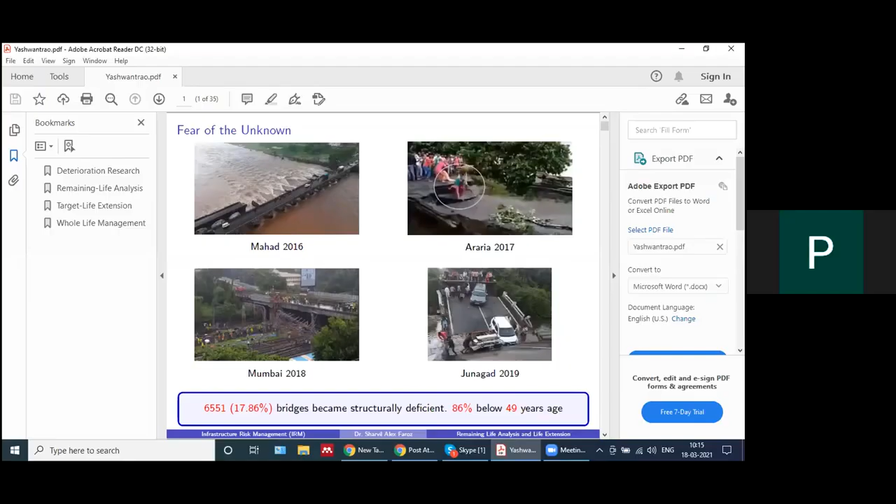Before getting to the main topic of my presentation, I will give you a kind of background. You can also give your comments in the chat box. How many of you, when you are going under a bridge, either walking or going through a vehicle, do not feel safe? I myself, sometimes when I'm walking under a bridge, I look up, thinking will it fall or not. That is how the situation has become these days.

So basically, it is the fear of the unknown. We don't know when a particular bridge is going to fall. Why has this mindset come? Because from the past 5 years, since 2016, there has been at least one bridge collapse in our country. Here are a few major events which occurred.

In 2016, this was the Savitri River bridge collapse in Mahad. Then in 2017, there was a bridge collapse in Bihar, Araria. Then in Mumbai in 2018, this is the Andheri bridge, and then the Junagad bridge in 2019. So if you see, every year there is one bridge collapse. So it is natural that we feel unsecured when we pass under a bridge or any other infrastructure.

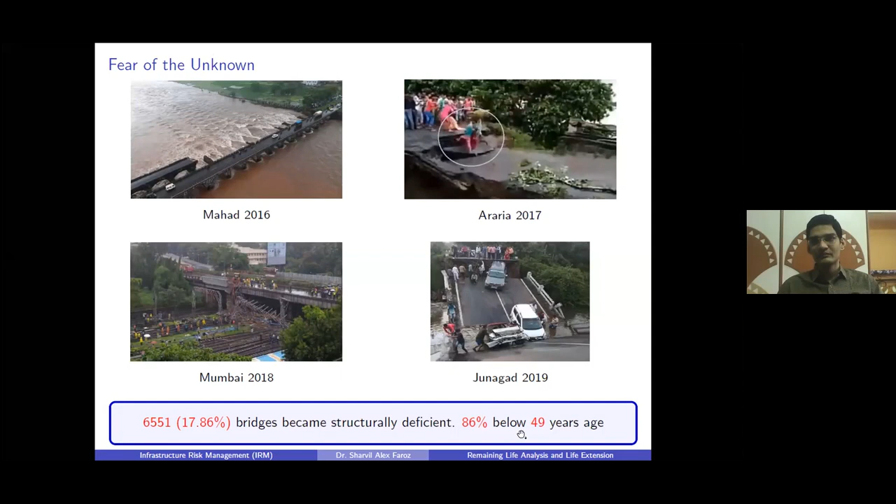Now, as I told you about deterioration, these are very important if you want to know the condition of a bridge. Since this is a platform for innovations in concrete, understanding deterioration is also one of the innovations. So let us understand a few basic deterioration cases which are very common. There are others also, and since we have a limited time frame of 1 hour for our presentation, I'm going to present only limited technology. In 1 hour it's not possible to cover everything for a given bridge, but you will get an idea of what kind of things are going on.

There is chloride-induced corrosion and there is carbonation-induced corrosion. If you go to a beach and observe the structures close to a seashore, you will find that a lot of corrosion is happening, because of the chlorides which are coming from the sea. They go and attack the concrete.

Then the second one is loss of strength of the concrete. If you build something at M20 grade of concrete now, over 50 years the strength will reduce somehow, because of other various attacks which are occurring.

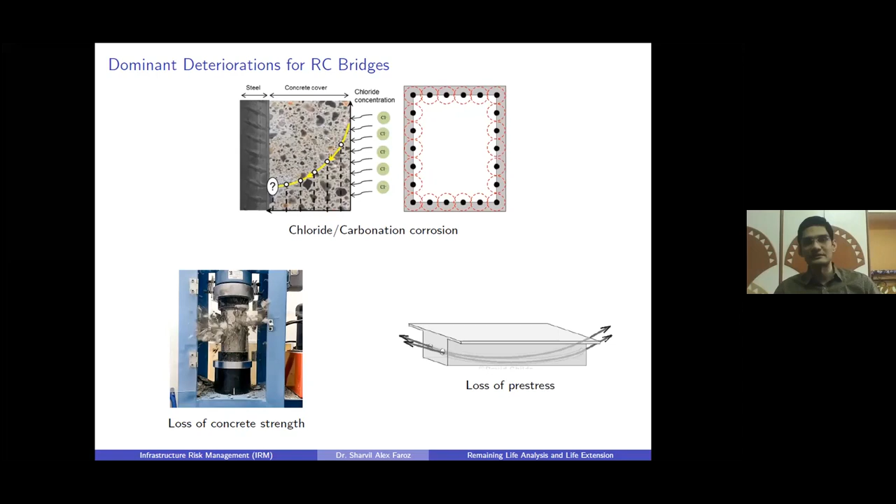Then this last one here is the loss of pre-stress of concrete. We are seeing a lot of pre-stressed bridges, but over time these strands lose their pre-stressing force, and this is a very big challenge in the industry today, because many bridges we have constructed are pre-stressed, but we are not able to find out what is the existing level of pre-stress. We have also developed technology for this, but again, this is limited to only remaining life analysis. So I'm not going to tell more about this.

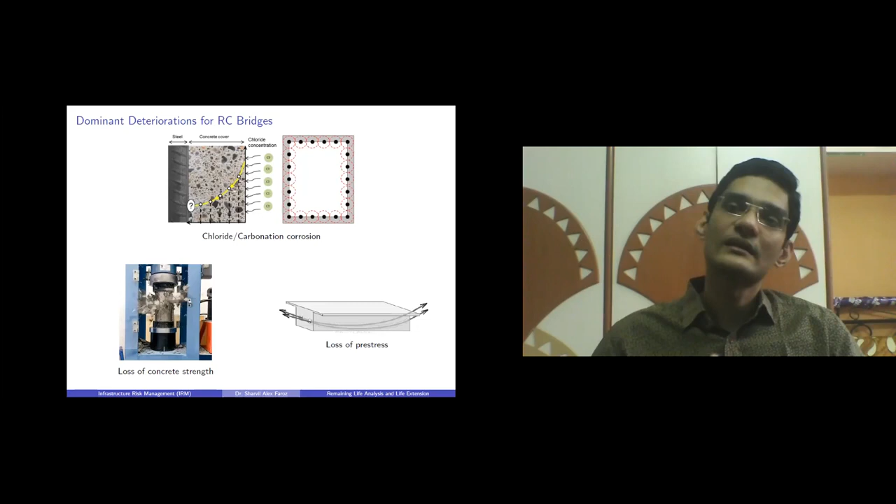Basically what it says is, when these old bridges or buildings or any dams were constructed, say 40 years back, we did not consider deterioration to be an important factor in its life cycle. What does it mean? That when we designed this structure, we did not take into consideration that in 10 years it is going to corrode, and then what will be the reduction in its capacity—that we did not account for.

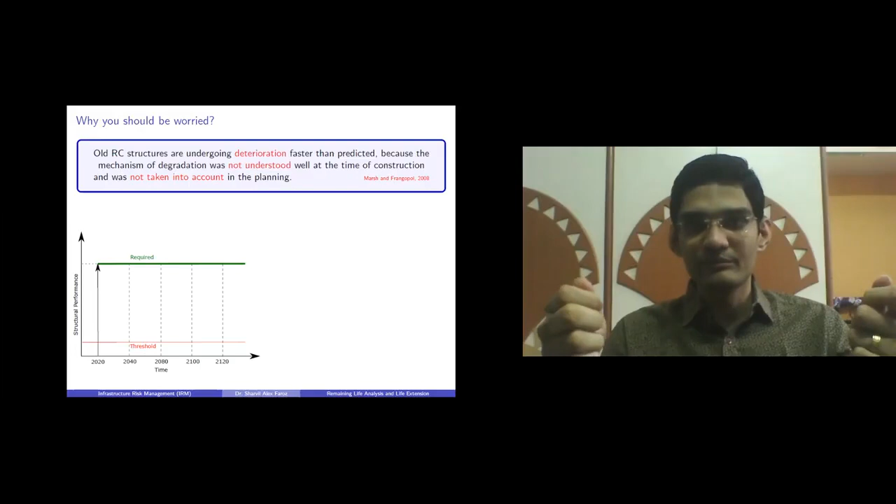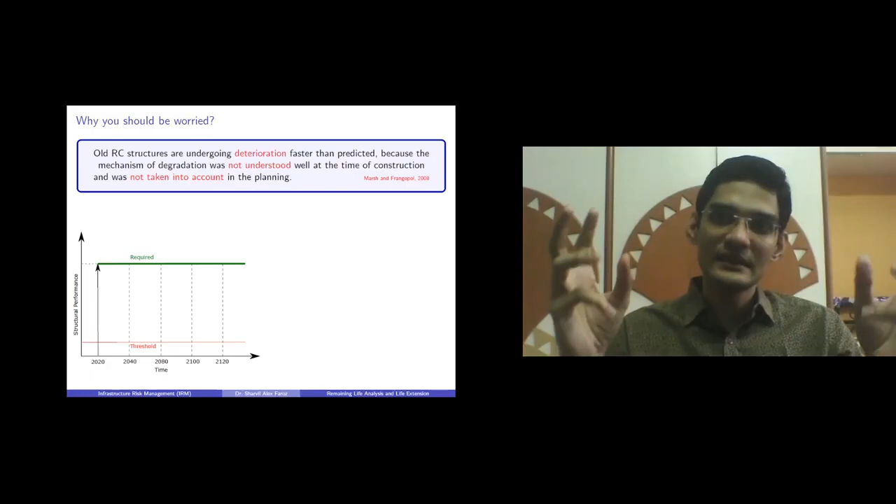You know that in simple language, if we do not consider a particular load on a bridge while designing, and when that load comes on the bridge, it fails. This is a simple logic. So we did not consider deterioration to be an external load. Therefore, whenever deterioration takes place, it causes failure of the system.

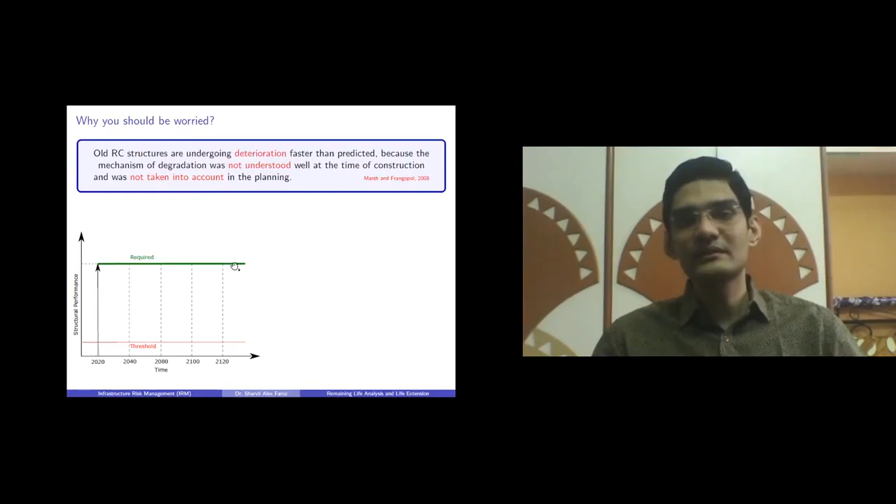So here in this figure, you can see what I am basically saying: when I constructed this structure, I considered that the performance is going to be the same throughout its life. That is how we used to design the structures—we did not consider that the performance is going to fall down.

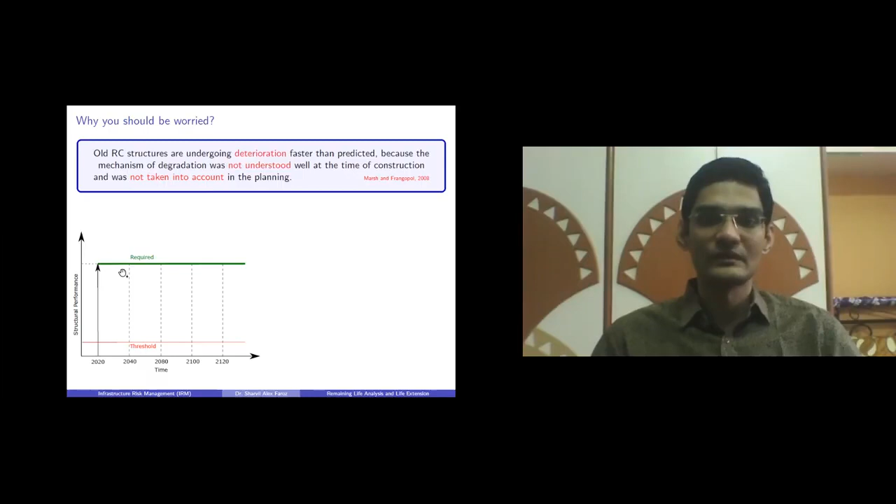Then the other issue is also that when we are doing investigation of these bridges, we do visual inspection. But what happened in New Zealand, these engineers were going and doing inspection of the bridges. And one of the bridges, called the Sorell Causeway Bridge, they also inspected. It was very close to the seashore, and it was a pre-stressed concrete bridge.

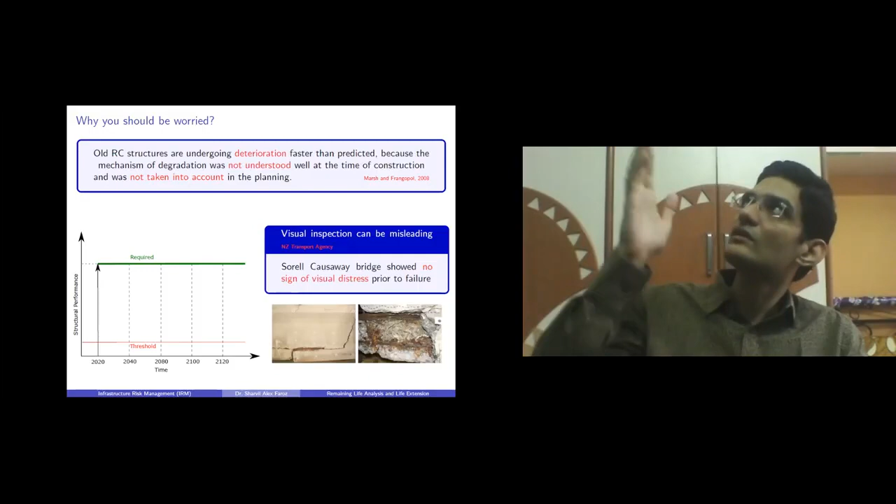The engineers came and they saw, okay, everything is very nice.

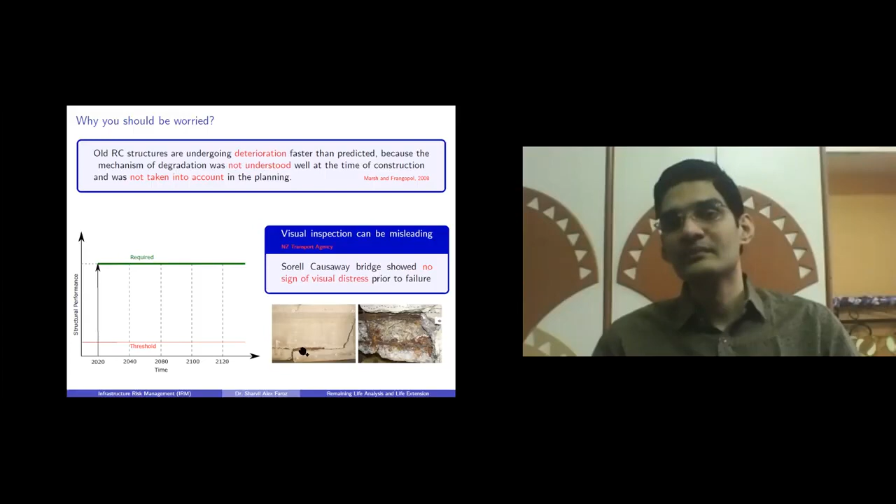So this is also one issue. We cannot rely on visual inspection always to check the condition of a bridge. This is also one of the reasons why bridges have been collapsing.

So what we learned here is two things. First, we did not consider the deterioration at the design stage. Second, visual inspections cannot be relied upon. So we need something better to do an assessment of the bridges.

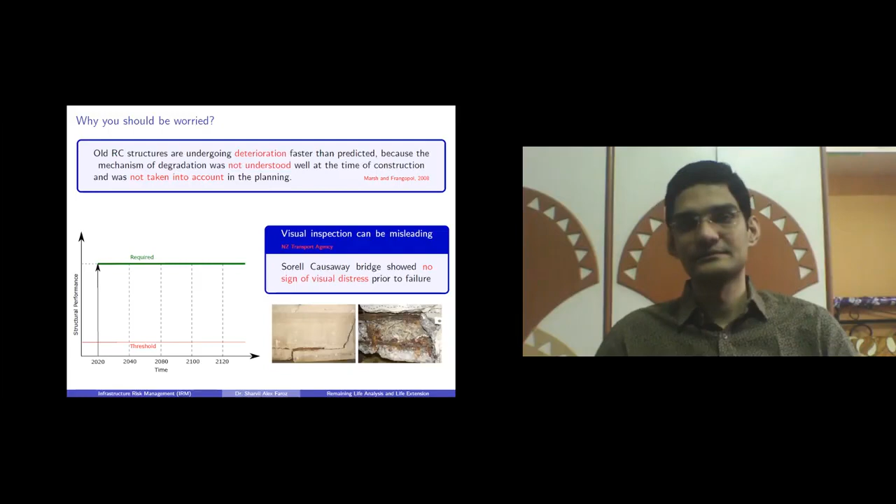Let me share with you 3 points, or 3 demands, of the bridge owners.

Recently I spoke with one of the PWD engineers, and they told me we have so many bridges. The issue is, first of all, we do not know what is the condition of the bridge. Since there are so many bridges, it is very difficult for us to tell if a particular bridge is going to collapse. Is it safe? That we do not know.

So the first question they always have is: when will this particular bridge collapse? If you have a bridge, will it collapse today, tomorrow, day after tomorrow, or will it collapse when I am standing below it? This is a very fearful situation which exists today.

And the second question they ask is, if we want to extend the life of that bridge, is it the right time to do the retrofit, or is it the right time to do a repair or rehabilitation of the bridge? I will tell you why this is important.

First of all, a bridge is so costly that you cannot directly go and replace it unless there is a complete collapse. So first we want to save money, because the government says we do not have enough money to spend. Therefore, with the minimum amount of money, how can we extend the life of the bridge? So the timing of retrofit is also very important.

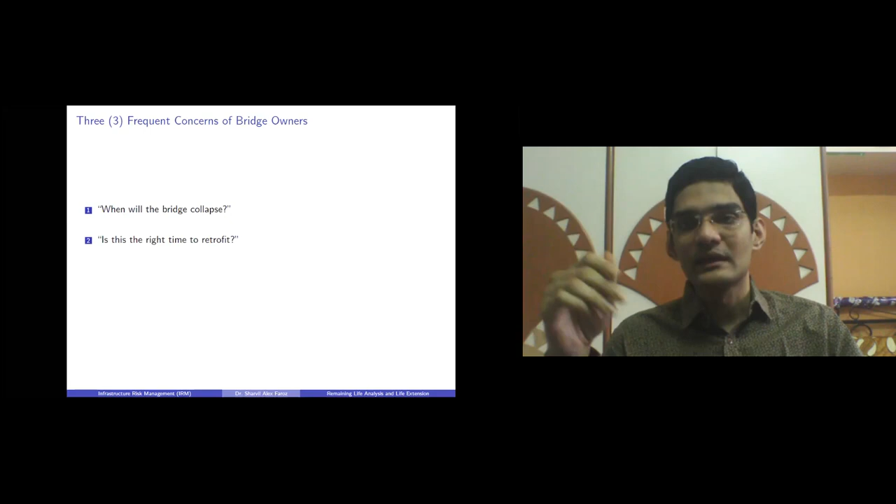Now suppose if I knew 5 years back that my bridge is going to collapse on 19th March 2021, then I would have done repair at that time, 5 years ago, and I would have spent very little money to extend the life of the bridge. So the timing of the repair is also very important.

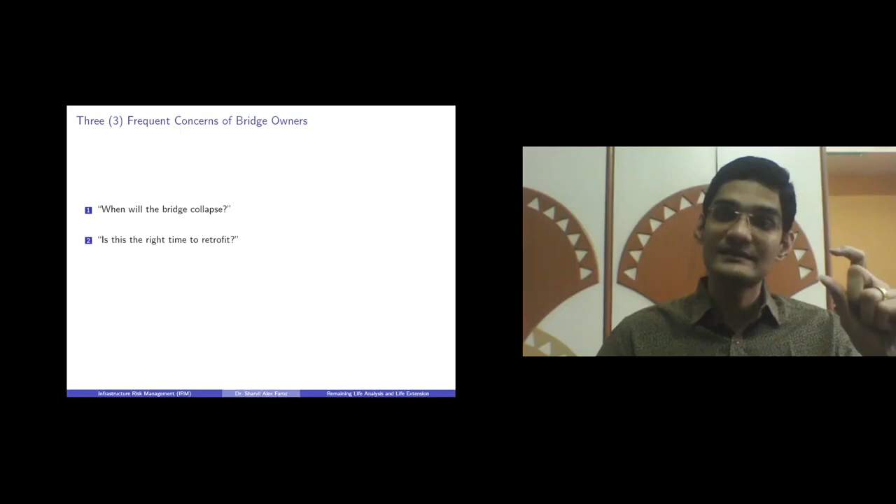So the timing decides the amount of money, because the more the deterioration, the more money you have to spend on the repairs.

And thirdly, if I want to extend the life of the bridge for 10 years, what kind of rehabilitation scheme should I use? Now you might have this question, why am I including this here. I will tell you why.

What these PWD guys told me is that whenever we ask the contractor or consultant, who are basically the repair contractor or repair consultant for bridges, what will be the extension of life after you do the repair, they will say 5 to 10 years.

You also heard this, right, that the repair contractor or consultant will say the life of this bridge can be extended by another 5 to 10 years. So 5 to 10 years will extend the life of this bridge.

Now when the PWD asks them, is it 5 or is it 10? They say, okay, we'll take some average value. So even the contractors or consultants themselves do not know if the life extension of the bridge will be 5 years or 10 years.

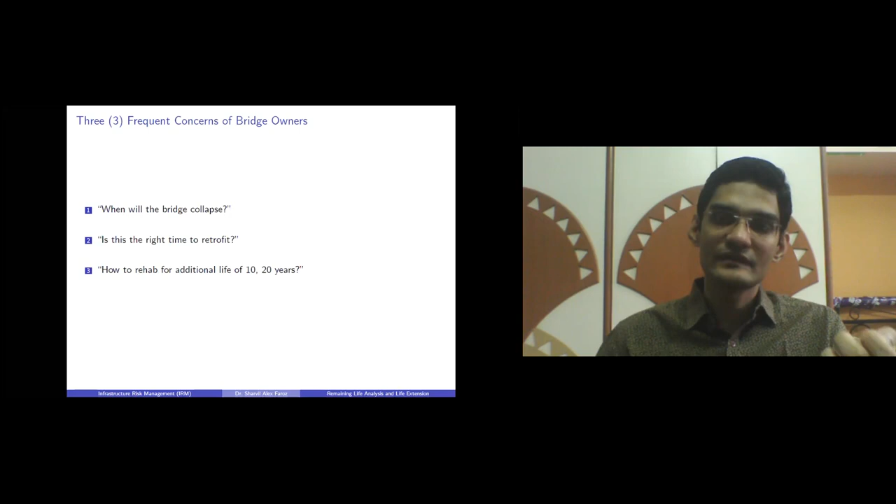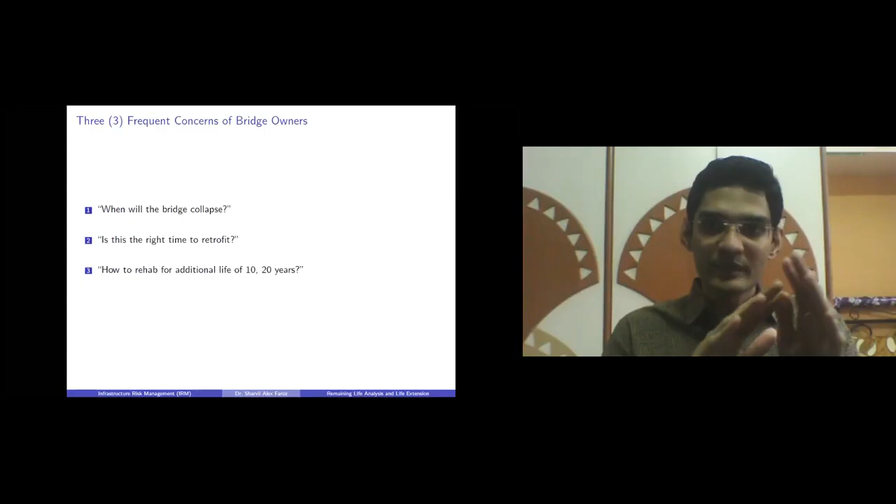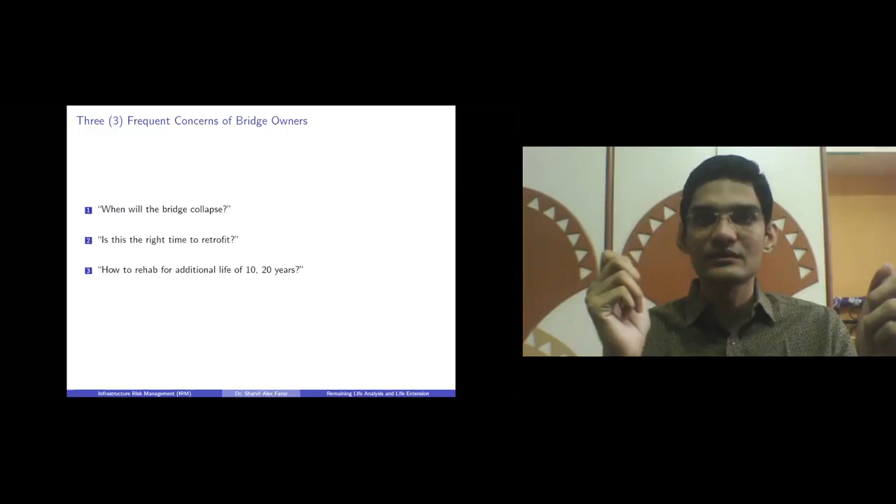So we have to do something such that whatever retrofit we are doing to the bridge, its performance is such that it is in our hands to control it, so that we can provide exactly the repair needed to give an exact life of 10 years or 20 years. This is very important, because ultimately, as I told you, when we are standing below a bridge, we think it will fall down.

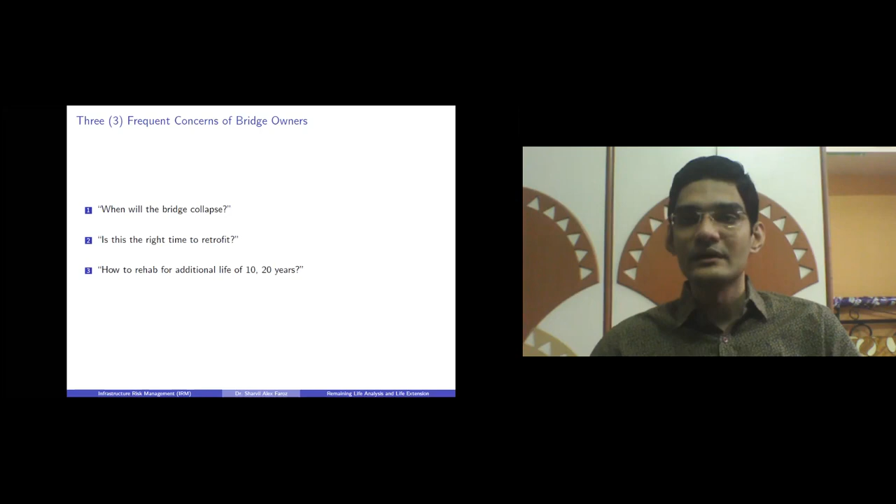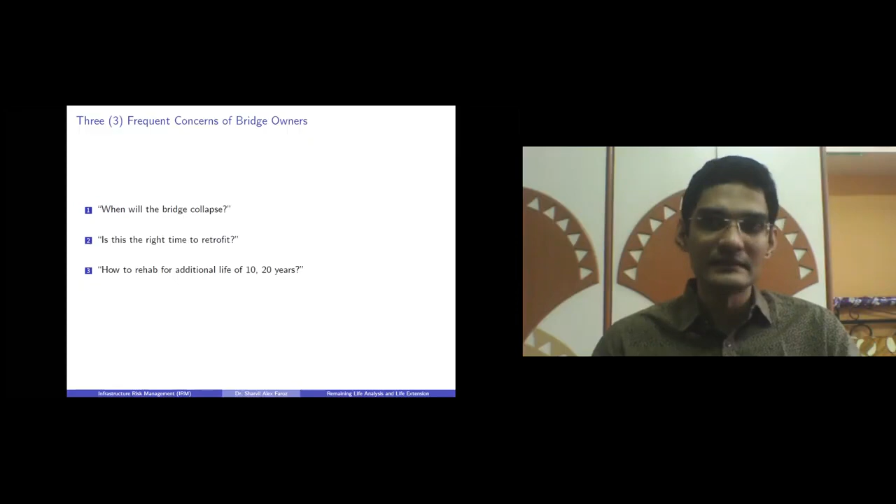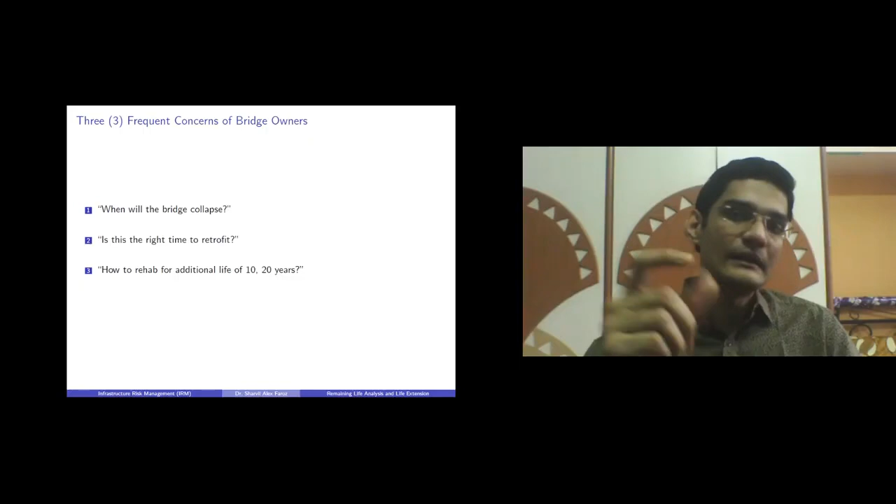It means that we do not have confidence in the bridge. Similarly, when the contractor says 5 to 10 years, it means the contractor himself does not have confidence, and we also do not have confidence. So if we have a precise confidence on the life extended, that will be really helpful and beneficial to the country and to ourselves also.

Considering this background, now I will go through the presentation. Basically I am focusing on two things: the first is remaining life analysis, and the second is target life extension. Target life extension of a bridge means the kind of scheme or retrofit which will be applied to the bridge so that we achieve an exact value of extension of life. So if you tell me you want a life of 20 years after retrofit, I will give you a complete calculation and complete testing of the bridge which will show that the life extension is exactly 20 years. That is something new and innovative that we are doing in concrete technology.

Before the next slide, I always like to present about research, because research is very important. When I first started my company and went to the client and told him about this technology...

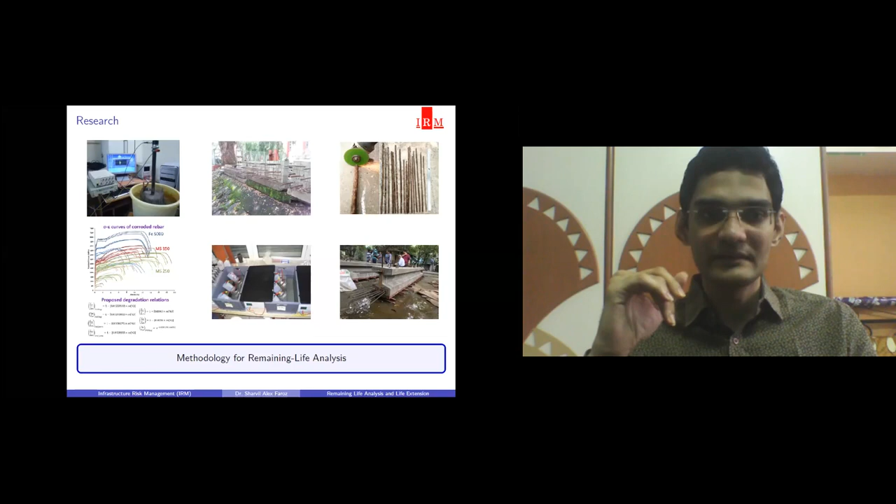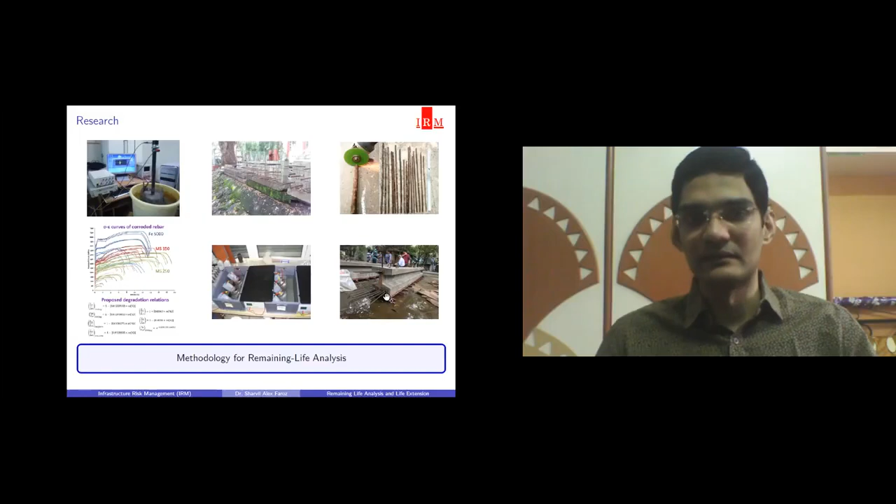So basically in this research, what we did is study and develop the deterioration functions for concrete as well as steel, and how they behave over a period of time. We also did more studies, but here I will focus on corrosion and how to do retrofitting. Ultimately, we formulated the methodology of remaining life analysis.

In short, remaining life analysis is kind of a Janam Kundali of the bridge. We predict in the future when it is going to collapse. It is like a horoscope of the bridge, where we know when it is going to need repair, when it is going to collapse, and so on.

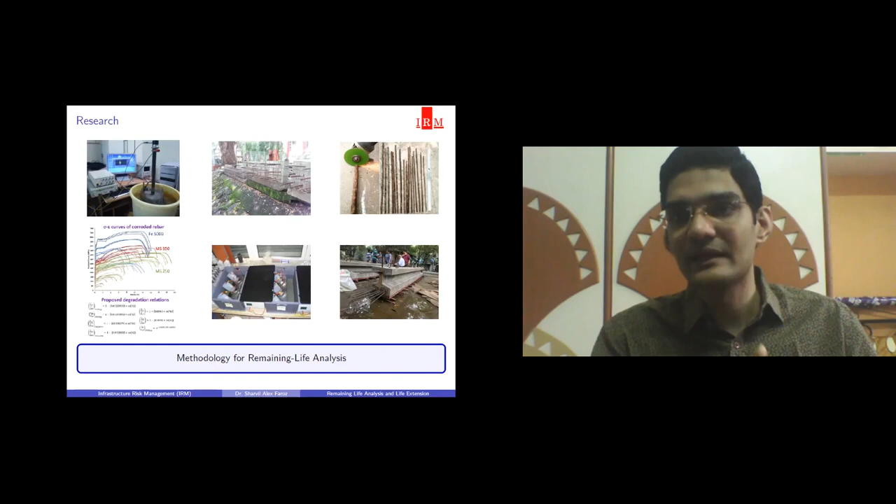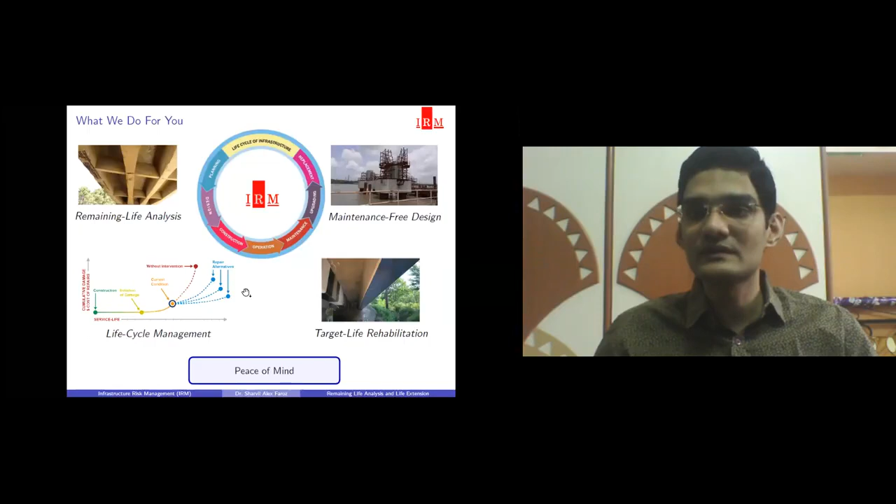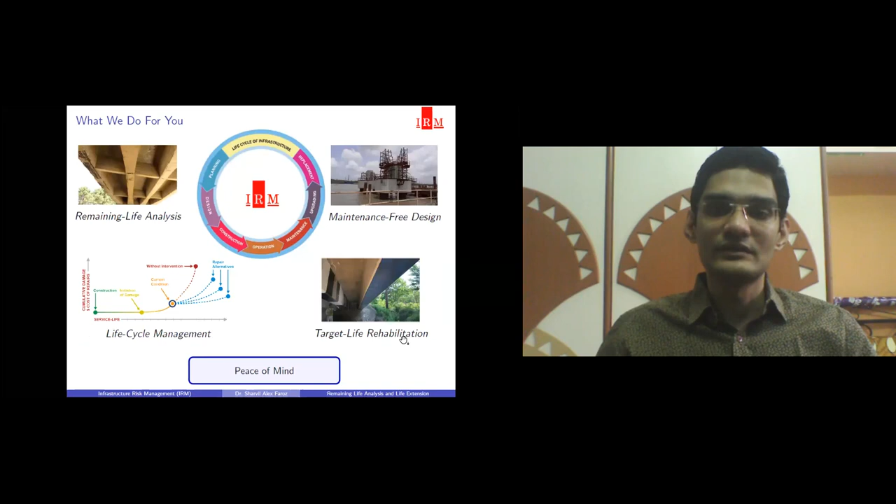My company is specialized into 4 sectors. One is, of course, remaining life analysis, which I am going to talk about. Then maintenance-free design, which I talked about in the earlier part. Then life cycle management. And today's another topic is target life rehabilitation. So these two things, remaining life analysis and target life rehabilitation, I will be talking about today.

Before going to remaining life analysis, if you have any doubts, please let me know. You can put it in the chat box or directly raise a question to me. If there are no more questions, let me know, then I can proceed. You can proceed, sir. Okay, thank you.

Before going to remaining life analysis, let us understand the difference between a structural audit and a remaining life analysis. You are very much aware of the structural audit, which is something we do periodically to check the condition of the bridge. But if you think very critically about a structural audit, you would conclude that even after all the formalities we are doing, inspections every 2 or 3 years, why are bridges still collapsing? If structural auditing is being done properly, then why are bridges still collapsing?

So the fundamental problem of a structural audit is that it doesn't tell us the future of the bridge.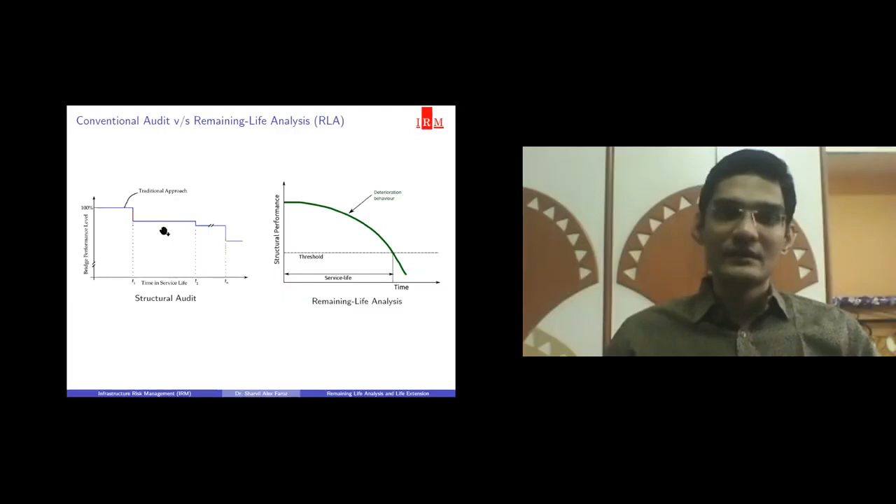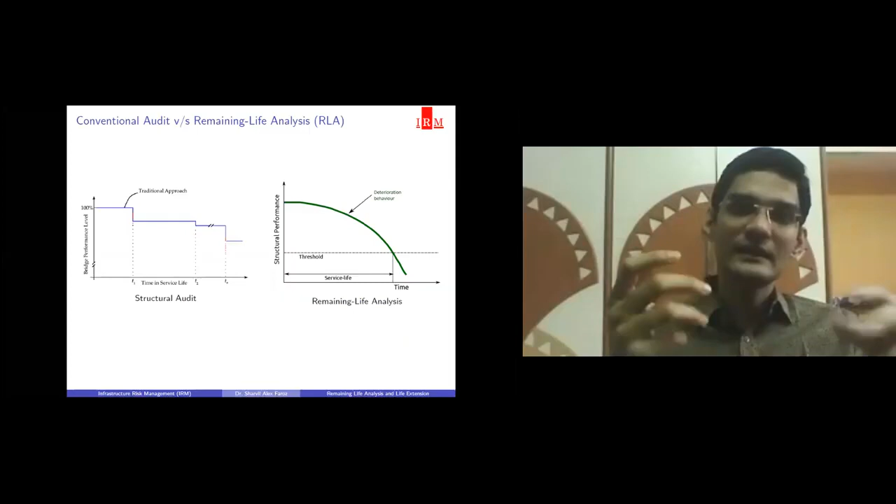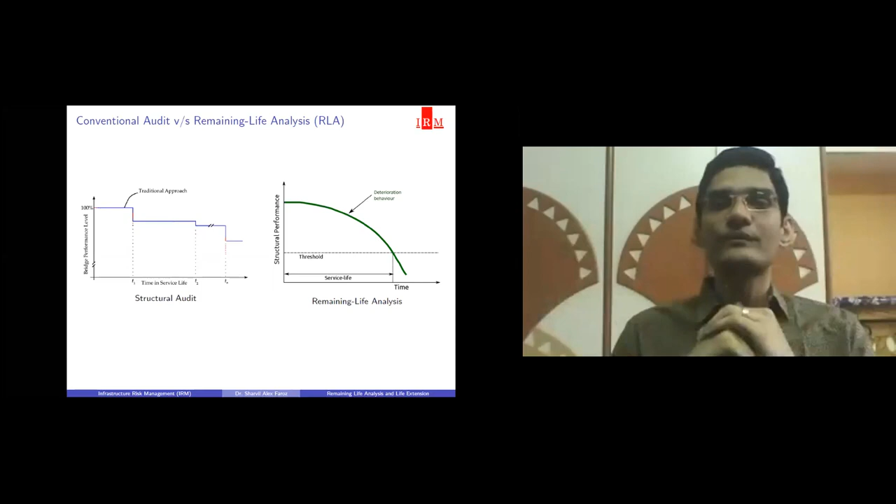If we are not able to predict how the bridge is going to behave over time, then if that bridge collapses between time T1 and T2, we are completely unaware, because the structural audit is not able to provide us with the prediction of future behavior. So this is the basic problem with structural audit. Even if you are doing structural audit, it does not prevent the bridge from failing or collapsing. You cannot tell from a structural audit when the bridge is going to collapse.

Whereas on the right hand side, in remaining life analysis, it shows you a continuous, degrading behavior of the bridge. What it helps you is it tells you precisely at what time there is an end of service life, which can be either the collapse of a bridge or when the bridge would require its first repair. So that is how remaining life analysis is a better way of doing an assessment than a structural audit.

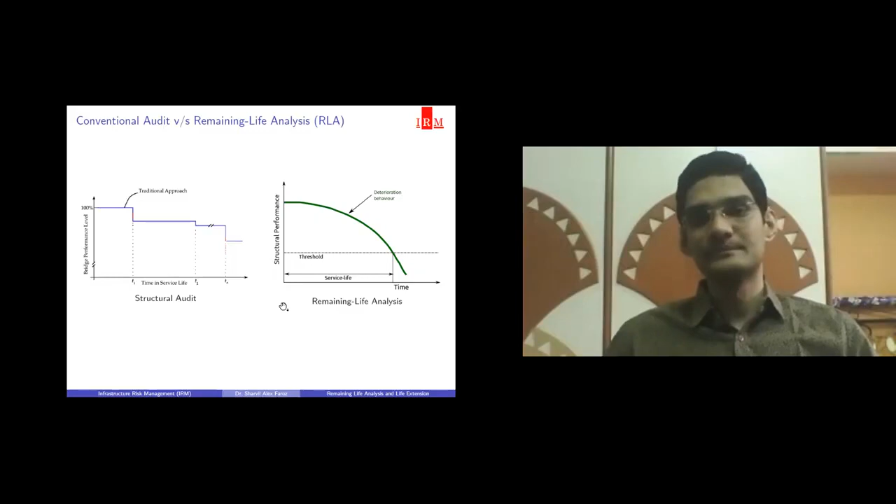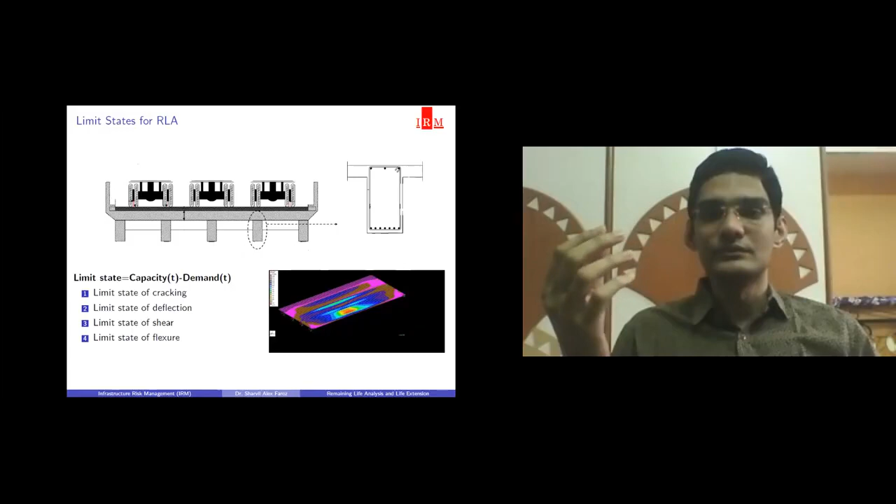So now to determine the life of a bridge, we need to first identify what are the critical deteriorating factors for a particular bridge. Let us consider this bridge is there. Then you have heard about the limit state of collapse, limit state of serviceability, right?

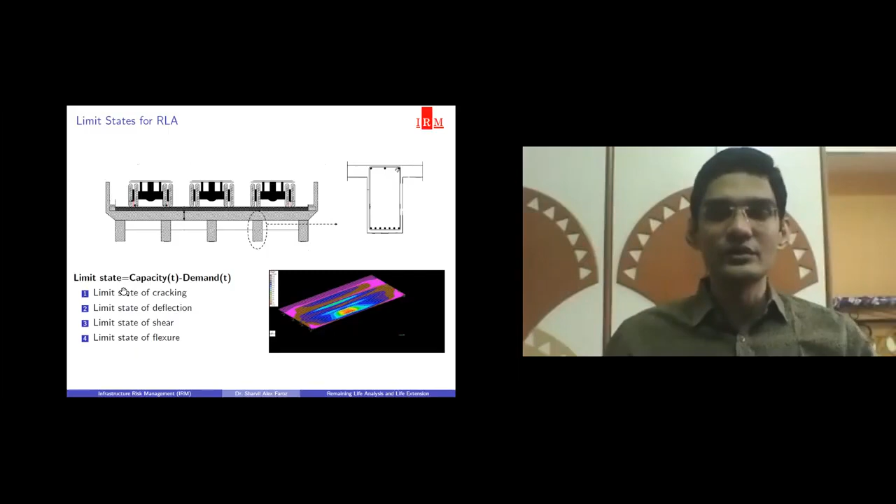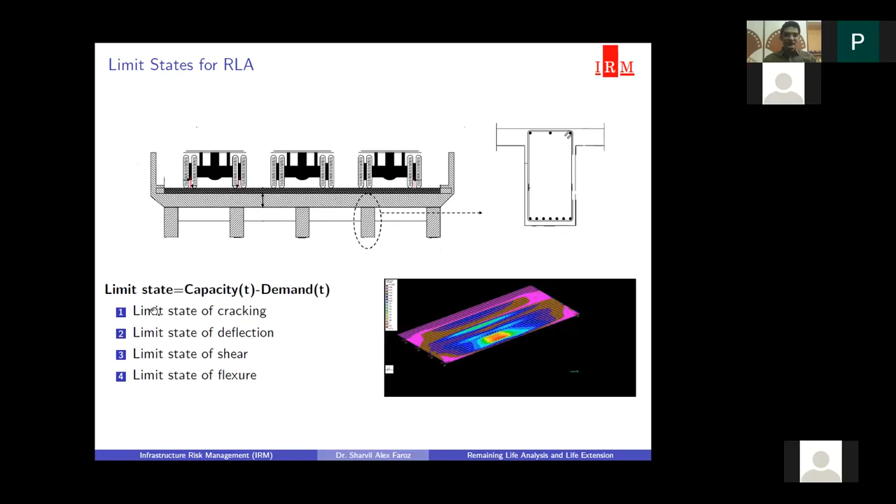So these same limit states we are going to use, but in a better way. You are aware of these four conditions: limit state of cracking, limit state of deflection, limit state of shear, and limit state of flexure. Now the first two are called the limit state of serviceability, and the second two are the ultimate limit states.

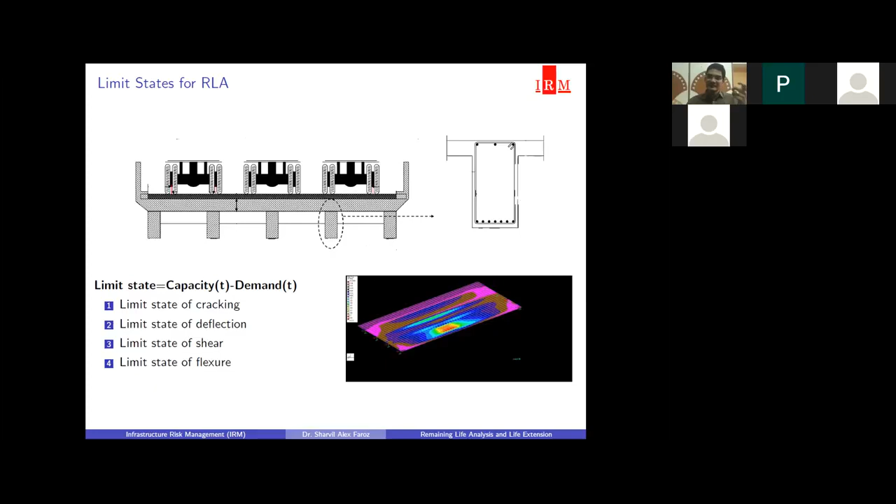So depending on what kind of situation you are handling, let me give you an example. Whenever you see a crack in the bridge, you go for a repair. So appearance of a crack on a bridge is the signal that the bridge requires some repair. So you can have a limit state of cracking here, considering it as the end of service life.

Then suppose your criteria is that there should not be much deflection of the bridge, so that could be your end of service life—whenever that bridge crosses over a certain acceptable deflection, that is the end of life. Or you can have shear or flexure similarly. Now the important thing is to predict when this cracking or deflection will happen.

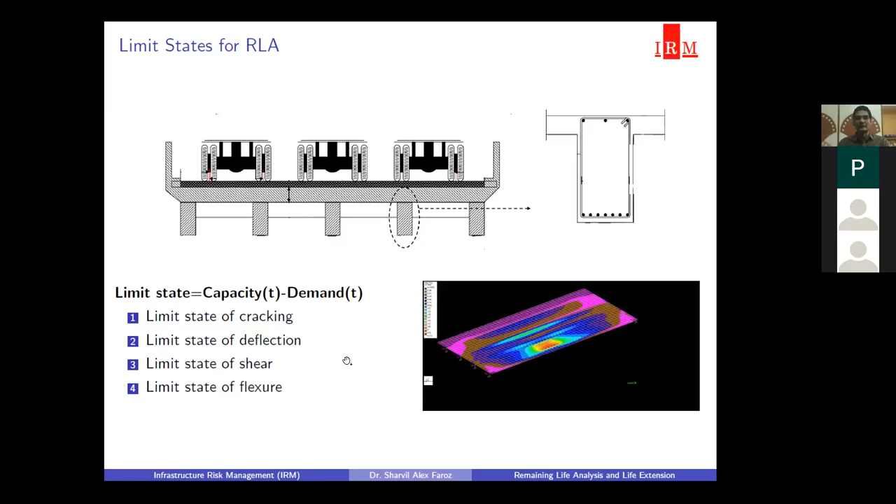That is most important, that is where the remaining life analysis comes into play. So I will share with you one project directly, a project which I did during my PhD itself. We took this as a study for the PhD, and where we implemented all these technologies.

You can see a very simple bridge is there. It is a slab bridge supported on masonry piers. So we are focusing on this slab bridge itself, which is a 6 meter span, 230 mm slab thickness, and reinforcement of 25 mm running both sides.

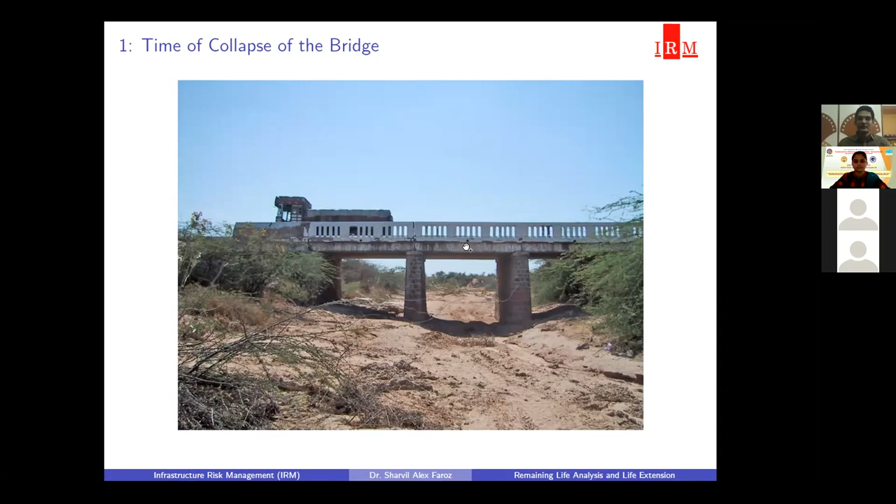So first of all, we need to first find out what is the strength of the concrete, because if you want to find the structural performance, two components we need to see. One is concrete, one is steel. So both we need to study to find how it is going to degrade.

So here in this first stage, what we did, we had to first identify what is the strength of concrete. Not just strength, okay, we need to find the characteristic strength, FCK, or the grade of concrete. Is it M20? Is it M50? So on.

Conventionally, what people are doing, they will bring hammer, do ultrasonic pulse velocity, do rebound hammer, and take some cores randomly somewhere. But by doing all of this, nobody has ever done the estimation of characteristic strength. What we just report is the average value of rebound hammer, average value of ultrasonic pulse velocity, and average core strength. And that too, very few cores are taken, 3 cores, 4 cores.

Now, if I take only 3 cores, how am I going to find the characteristic strength? Because if you see IS 10262, it says that minimum 30 concrete samples are required if I want to find out a good estimate of concrete strength. But here, if we are taking only 3 concrete samples, it is very difficult—I would say impossible—to find the characteristic strength.

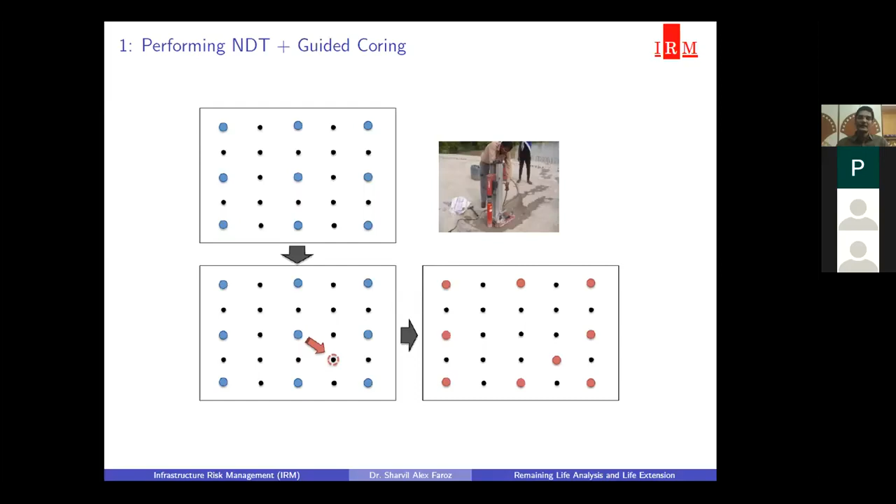Then once we have taken the cores, we need to establish a relation between UPV and the core crushing, because only 9 cores were decided—9 core selection was done. But again, IS 10262 says 30 concrete samples. So we need to first establish a relation between UPV and the concrete core.

So this is the relation between UPV and concrete core strength which we established. You can see there is a lot of variation. These red spots are the actual data points, and there is a lot of ups and downs—there is no smooth line. So it was necessary that we capture this variation also, this scatter, which is called here.

So now what has happened? We have established a relation between concrete crushing and the ultrasonic pulse velocity. So now, basically we are finding out the strength of concrete at every UPV point which we have done. So thus we are automatically satisfying the codal requirement of 30 concrete samples without doing the concrete testing itself.

So by doing this, we formulate the distribution and the 5 percentile value, which is the characteristic strength or grade of concrete that we are able to establish. So here we have established the concrete strength properties complete, which is the FCK—the most important thing.

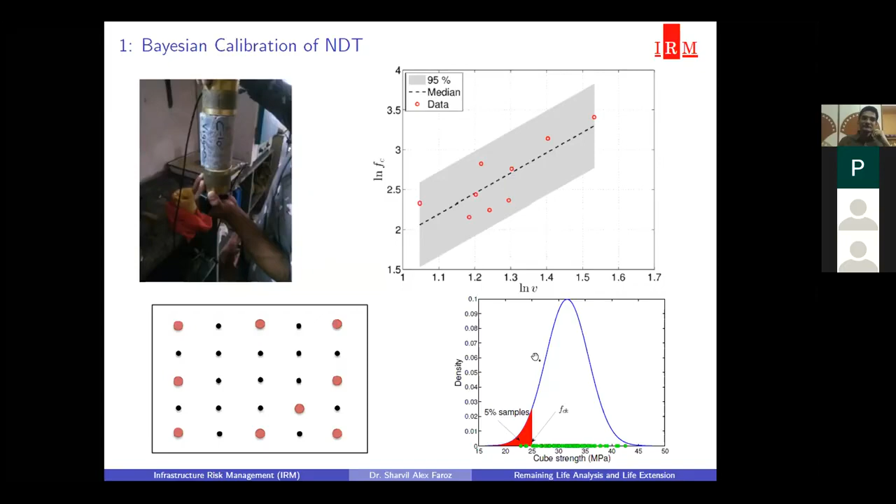Now we come to the steel part. We found that in the reinforcement work, there was a lot of corrosion. Considering corrosion, the rebar cross section will continuously go on reducing, and when the rebar cross section reduces, its load carrying capacity goes down.

To identify how fast the corrosion is taking place, we again thought of doing a strategic testing. We divided the concrete span into 3 parts: L by 3, L by 2, and 2L by 3. These are the reinforcements passing through, and the black spots are the locations where we wanted to do the test.

We want to find out how fast the reinforcement is corroding. This test is called the linear polarization resistance test, or you can call it the corrosion rate test. When you do the testing at these points, it gives you the rate of corrosion, or how fast that particular reinforcement is corroding.

But this test is quite costly, so it was not possible to do at many locations. We just did these 3 locations where we had our most interest. Then, using the kriging method which I told you about, we are able to establish what the corrosion will be at each and every point here. In this figure, where it is very dark or red, those spots are corroding very fast.

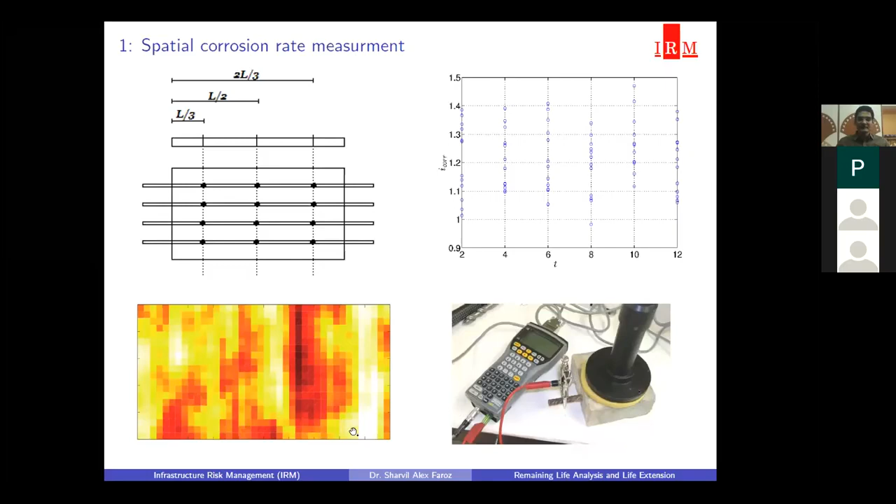Where it is showing light color, the corrosion rate is not that fast. So we have established a complete map of the corrosion rate of the bridge.

So now we know what corrosion rate is going to take place, and using these measurements of corrosion rate, we use these readings to update the corrosion model. What is a corrosion model?

This is a model which tells you what will be the loss of steel over time. There are a few models available in engineering knowledge which tell you how fast the steel is going to lose its cross section area. But there is a limitation: these models are limited to only being developed in the lab. So when we apply these models to actual site projects, they fail miserably.

But their physics is correct, that is one thing is sure, the physics is correct, but the trend is not correct. So what we did, we collected this corrosion rate data from the bridge itself and used that to update these corrosion models through Bayesian updating. Bayesian updating is one of the techniques which I am using very often, to update the corrosion model.

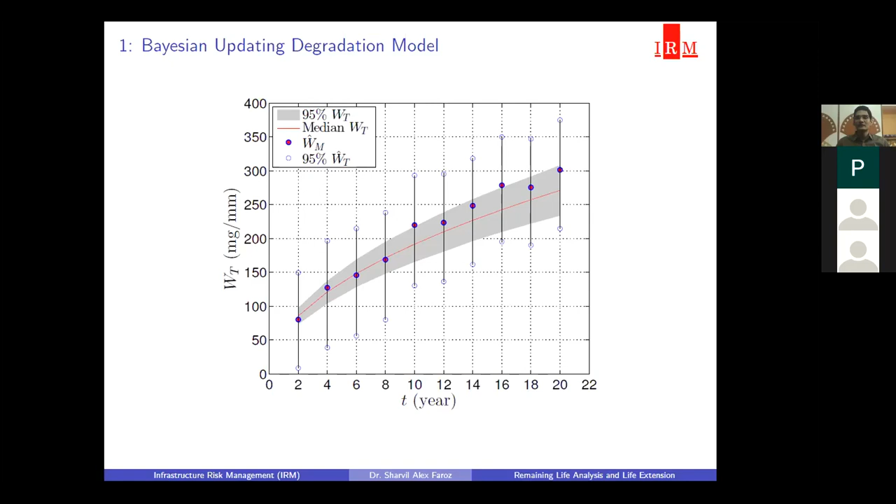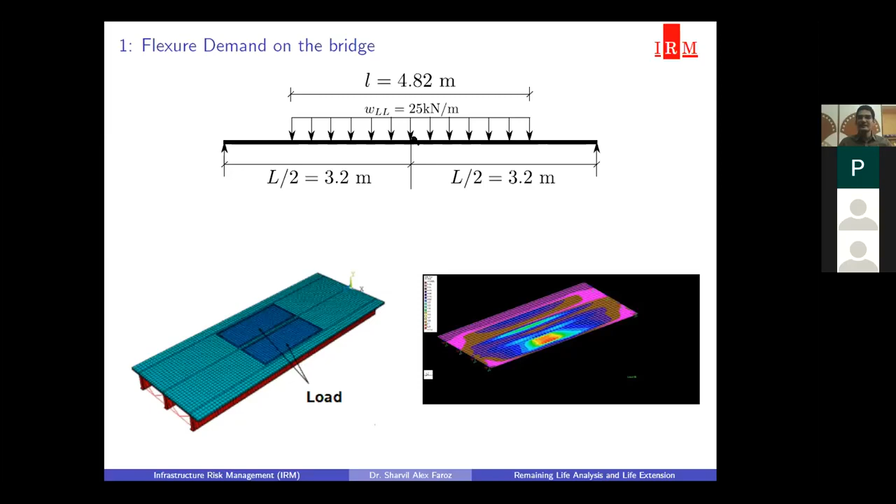So now we need to decide the limit state. This bridge was governed by the limit state of flexure. It is a slab bridge, so mostly the most governing factor will be the flexure or bending moment. We got an IRC truck load on this bridge. We measured, considered this limit state of flexure, and found out the most critical bending moment, which is of course at the mid span because it is a simply supported span.

This is then the limit state of flexure we have formed. MR is the moment of resistance of the bridge. The moment of resistance consists of two parts: one is concrete strength, and the second is how the steel is going to corrode.

For simplicity, we considered that whatever concrete strength we found out in this investigation remains the same, but we considered the loss of steel of reinforcement to be a function of time. So the reinforcement cross section area goes on continuously reducing over the next few years. That is the assumption we made.

Of course, this assumption can also be overcome if in the next 2 years I again measure the concrete strength, then I know how the concrete variation is going to take place over time. But that is also possible to do.

And this MQ is the external load. I told you, the IRC truck which we got on the bridge, that is the load, that is the bending moment induced by the IRC truck.

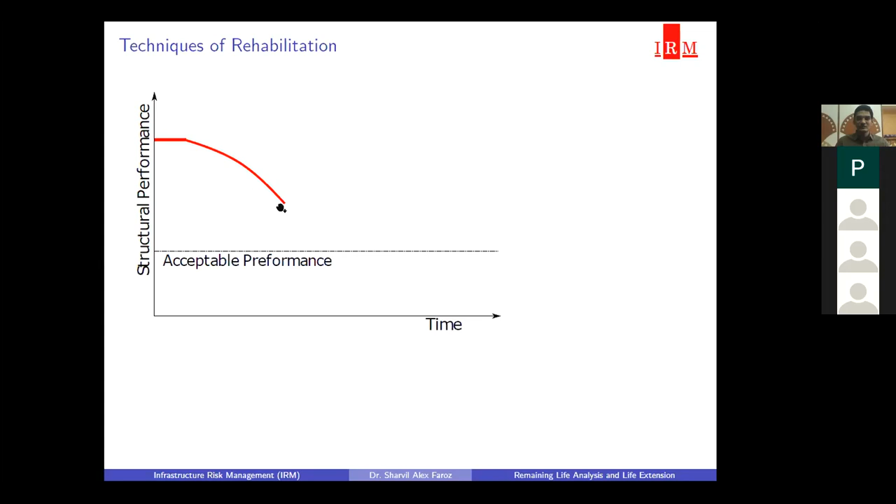So now let us come to the concept. As I told you, structural performance is there and it is degrading over time. Now we have found out in the previous section what is the time for the repair. So now we found that this is the time when we should do the repair. So here we did some repairing and the performance came up again.

So our current consultants and current contractors, they are limited only to this point. The client will come, approach them, and then they will do the repairing and that's it. They know how far up they have gone in terms of structural performance, but they do not know how long that repair is going to last.

So what my company is adding further to this is this part. What we do, we say we do the repair rehabilitation of the bridge, plus we also give you the confidence of the life of the repair. So if you tell me you want the bridge to have an extended life of 20 years, then accordingly, considering the performance or deterioration of the repair over time of 20 years, we do the corresponding kind of repair.

The concept is very simple, but the existing people who are there, they are not doing it, probably because of a lack of knowledge or they don't know how to handle such kind of situation. But this is a very simple concept.

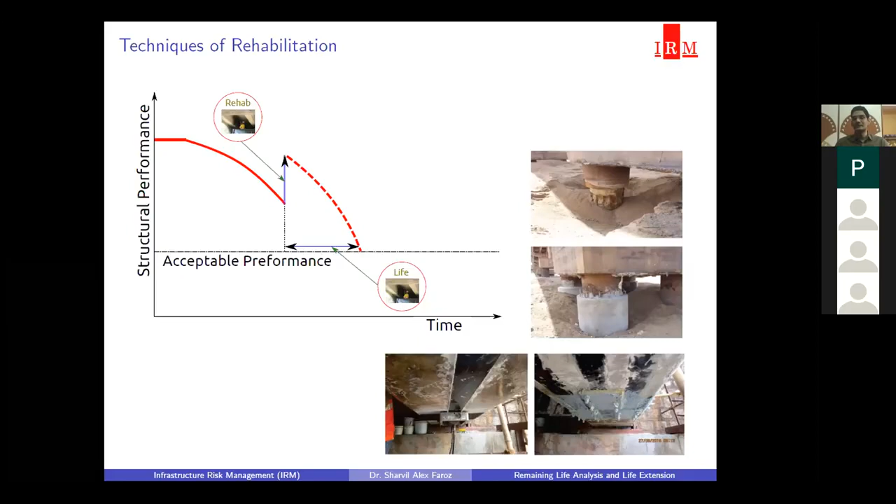So this is one project. Before taking any new technology to the bridge, they first ask, have you done a case study of this, have you executed an actual project of this or not?

So this project, this is not a bridge, this is a building project. But since this was the first implementation of the technology, I am showing it here for you. And after this, once this technology has been established, then the bridge owners are taking a lot of interest in this.

So what happened in this hospital? Okay, it was in very bad state. You can see here, this is one of the columns, and it was degraded completely. Concrete strength was just 5 MPa. Steel was also corroded. Lot of breakages were also there.

But this was a hospital building and there were many patients. Huge demand was there. So the client said, instead of doing a demolition, let us do a rehabilitation of this building. And we want a life of 15 years, because after 15 years we'll think of demolishing this building. But for now, let us have a life of the next 15 years.

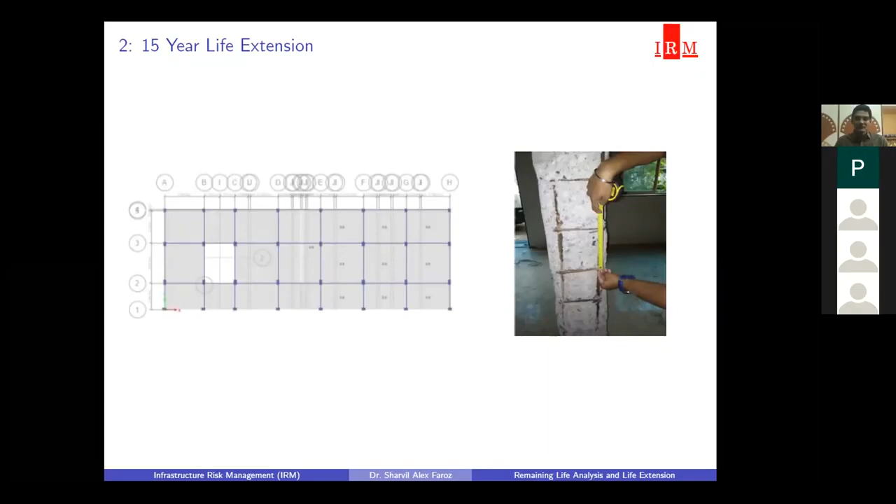So this was very specific demand from the client. The client themselves told that we want a life of 15 years, plus you should also give us the proof, the engineering calculation which will prove to us that the repair you are going to do will last for the next 15 years. So this is the schematic.

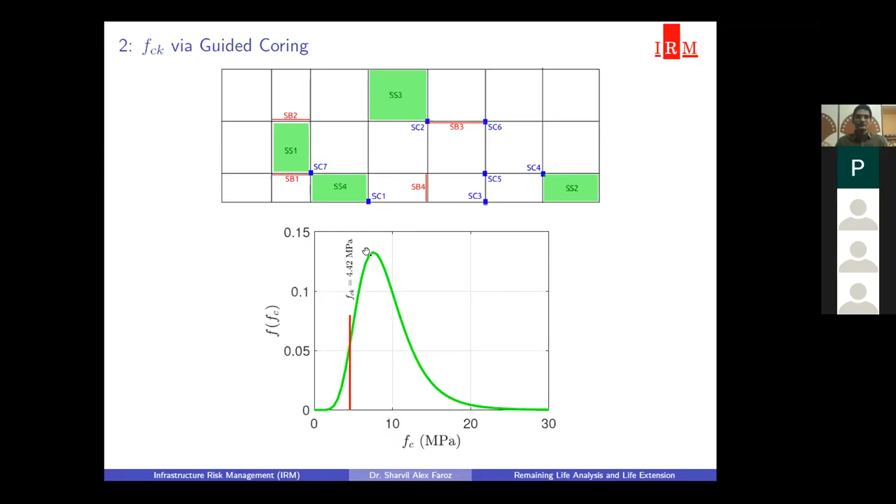We did lot of testing. We found out the concrete strength, which I have already explained to you. Now the thing was to identify the deterioration parameters.

We found out two deterioration parameters. One was the chloride induced corrosion, which was prevalent under the foundation level. There was lot of chlorides in the soil, and this was causing corrosion in the foundation. So first we had to identify how much chloride was there. So what we did in the foundation, where it was excavated, we did the so-called chloride profiling.

In chloride profiling, we found out the concentration of chlorides at each and every depth of the concrete. So we came to know what is the amount of chlorides at the surface of the concrete. On the surface, we had so much amount of chloride, say 1.3 percent mass of the concrete. So this was the amount of chlorides existing, that we found out.

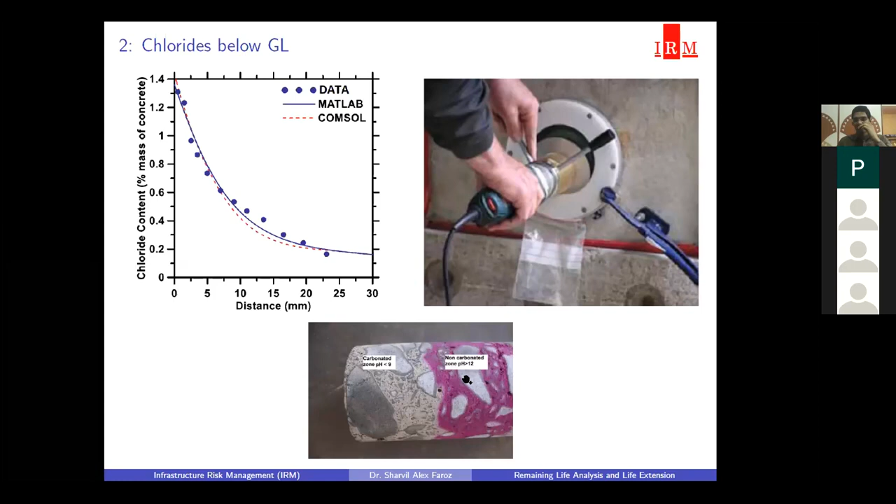And second, we also found out for the structural components above the ground, carbonation was the main issue of corrosion. So we tested a lot of samples for carbonation depth, and found out the amount of carbonation rate of the concrete.

So we found out two things. First, the chlorides existing in the soil and how fast they are going to penetrate through concrete. And the second thing is the rate of carbonation of concrete. These two things we found out, which were the deteriorating factors causing corrosion.

So once you have determined these parameters, you are in a very good position to tell, once you do the repair, how these parameters are going to affect your repair. And once you control this behavior, you can easily achieve a life of 15 years, what the client demands.

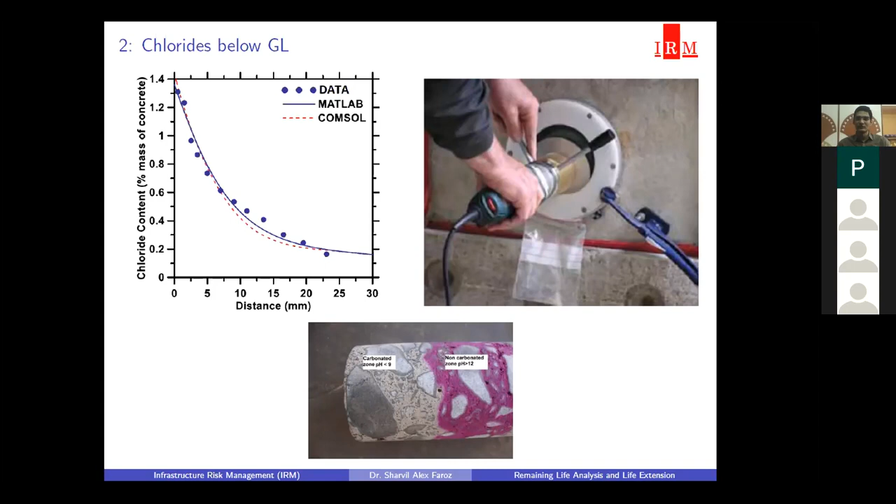In certain situations in the hospital itself, some columns needed increased axial load capacity. So that was done through wrapping them with fiber wraps. Some columns were also wrapped in addition to concreting, to enhance their axial capacity.

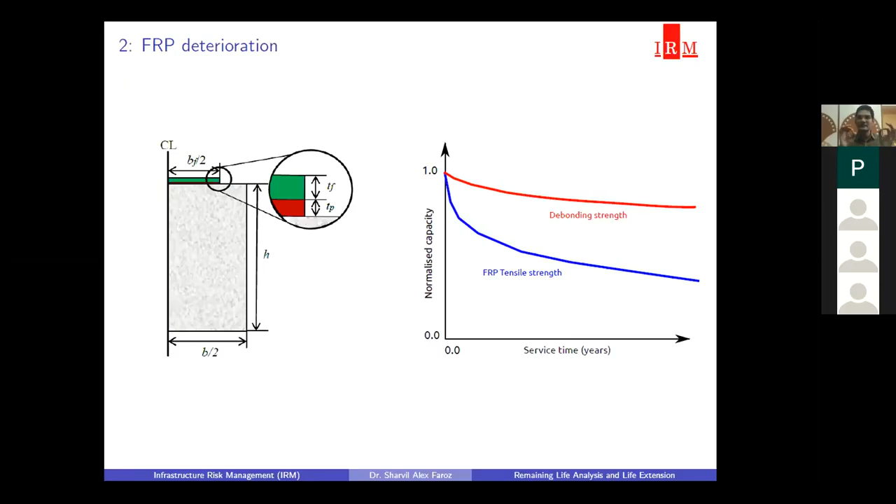So now, when the client says to me a life of 15 years, considering this deterioration behavior, reduction of strength of FRP over time, we are in a complete position to tell them, see, for 15 years your material is going to degrade, but its performance will always remain above your acceptable limit. And this is how we ensure for exactly 15 years it is going to serve the purpose.

See, this is very powerful here. You can see that the technology is so powerful. It gives you confidence, plus it also gives you the return of investment. So whatever money you invested for repair, it guarantees that yes, that money which you spent has been really spent in a very good project.

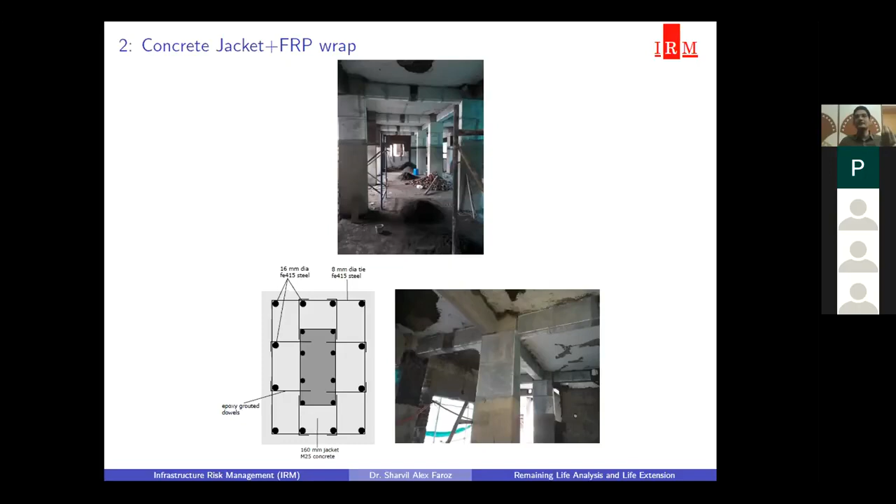So finally concluding my session today. This is whole life cycle management. So when you consider a bridge which is there, which was constructed a long time back, and a long time back means that when it was designed, deterioration was not considered in its design stage. So therefore, it is going to degrade.

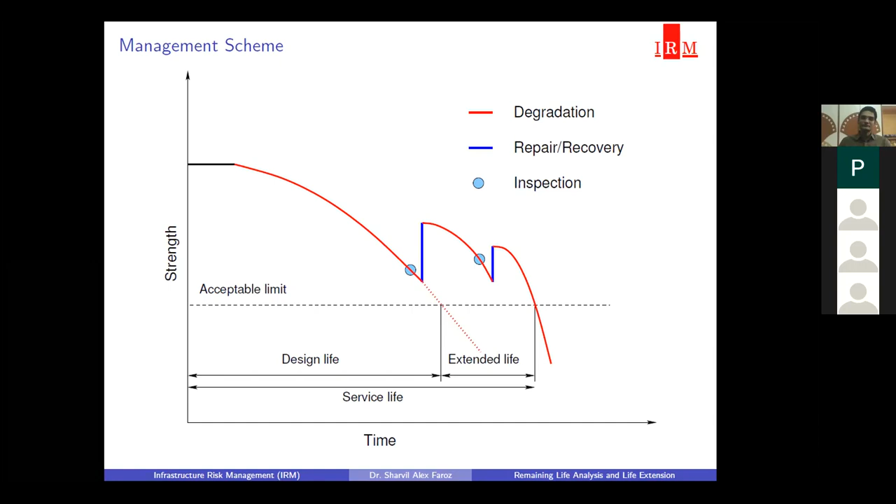So this is really an innovation in terms of concrete technology, because if you see, we are basically controlling the behavior of the concrete. If we are able to design the concrete in such a way that we are able to control its performance over the next whatever life it may be, it's giving a real revolution to the industry. And no wonder it will save your money, and plus it will give you confidence. So thank you, I end my session here.